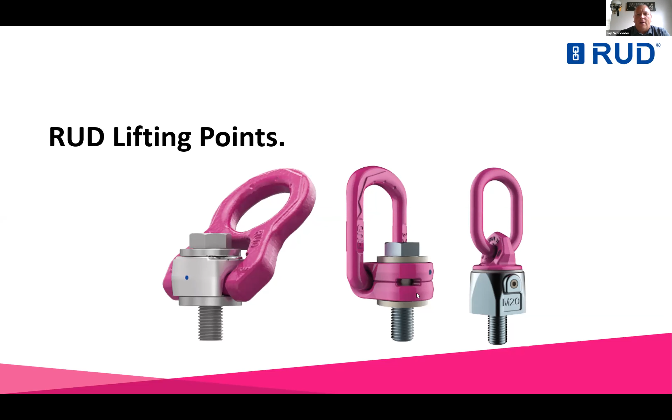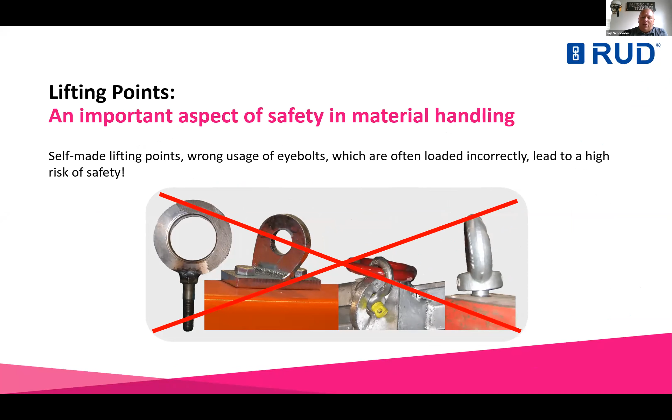So let's begin. Many times as we go into an end user, we kind of walk into the unknown. We see many homemade lifting devices or even modified devices. These are huge safety concerns, and it is one of the leading factors when we consider the design of new lifting points.

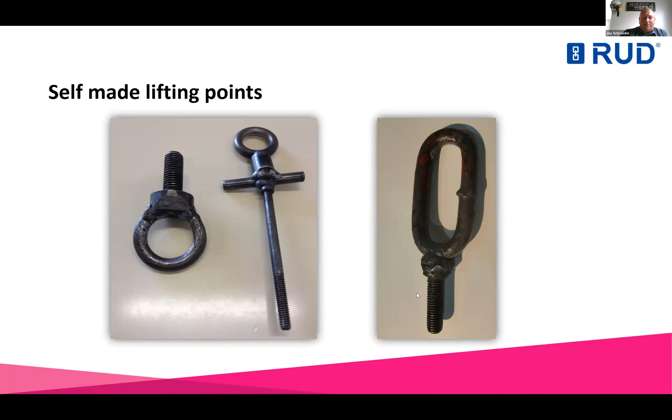RUD breaks down our lifting points in two categories, one for bolting and one for weld-on. So the first portion of the presentation is going to be on the bolt-on products, and then we'll work into the weld-on products at the end.

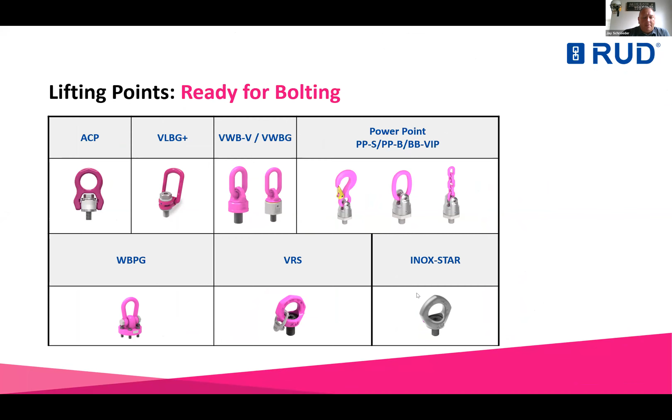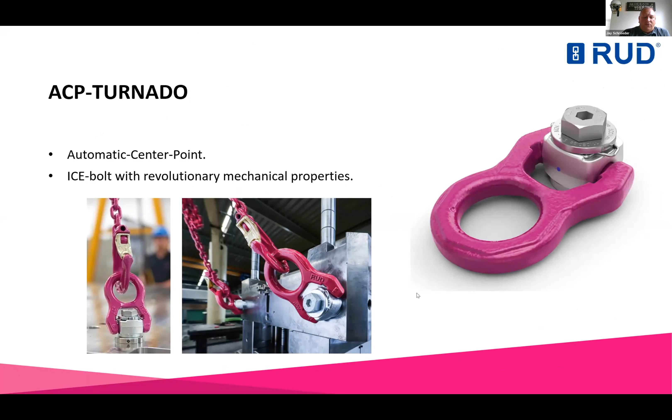The first product we'll talk about is our ACP, Turnado. This is our newest lifting point. We developed this to compete with the other center pull hoist rings. However, RUD feels that with a true center pull hoist ring, that when using in a side pull option, the hoist ring can get bound up, and when it gets unbound, it causes a shock load on the hoist ring and all rigging. So RUD has implemented a spring mechanism to keep the hoist ring from getting into that over center position.

As you can see in the bottom left-hand corner on the picture, you see a little spring on there. That will keep the bail from ever getting truly over the center of that bolt. So that's what we talk about when we talk about our unique RUD spring mechanism.

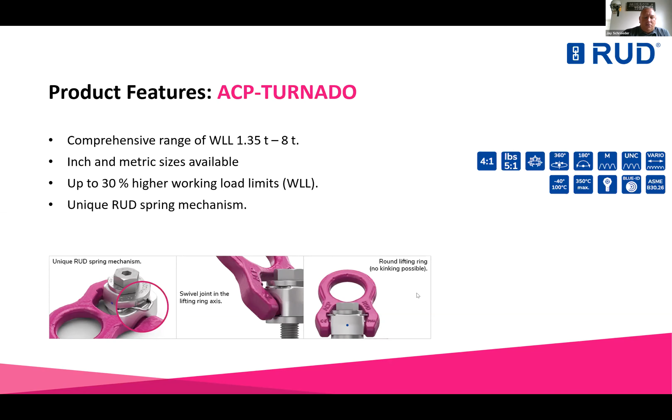The Turnado has a comprehensive range of 1.35 tons up to 8 metric tons, inch and metric sizes available, up to 30% higher working load limits due to the use of our patented ICE-bolt. So the ICE-bolt is available in metric sizes up to M30. It's something that we have designed and developed with some engineering staffs in Germany, and it has allowed us to take advantage of higher working load limits due to wear and the ductility of the bolts.

So again, this is our ACP Turnado. It does meet all ASME B30.26 standards. So that is a very important step for RUD, as before we only manufactured to the EN and DIN standards in Europe, and now we're starting to manufacture to the American, to the ASME standards.

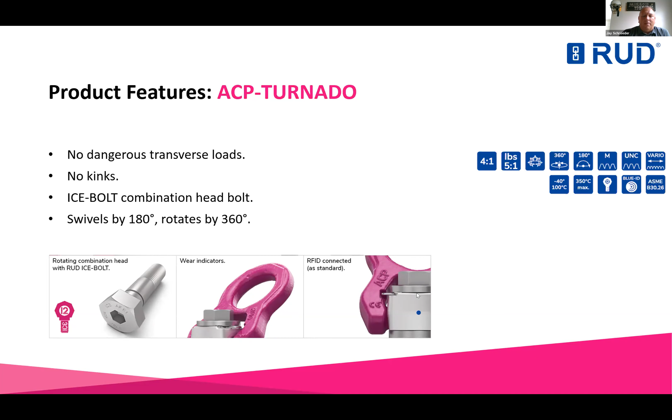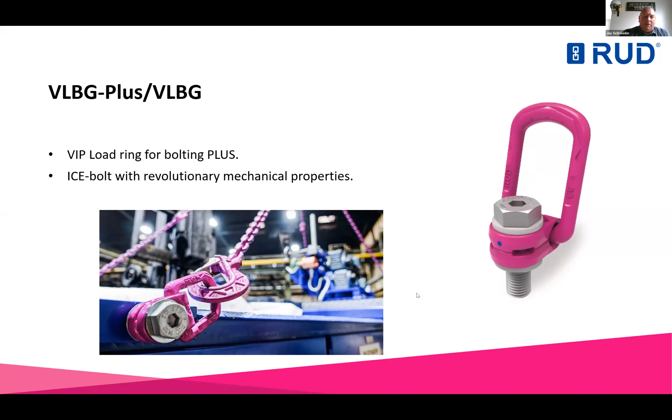The next product we'll talk about is the VLBG Plus and the VLBG. Again, you'll see this, here's a true side, offset side, this off to the side load ring. We have metric and inch sizes available, M8 through M48 and 3/8 through 2 inches. A working load range of 0.63 tons up to 20 tons.

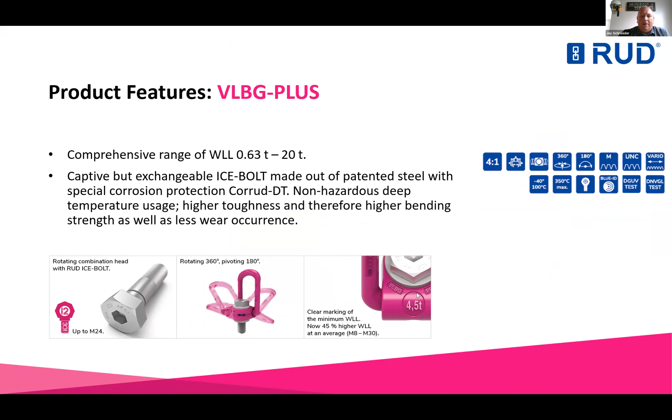The bolt is captive, but we can change it out. If you see the picture of the bolt on the left, you'll see a groove cut in there. We actually put a ring, a little keeper ring in there, and when you slide it down in the body, it snaps in and it's held captive. So if you damage your bolt during the lift process or as you're storing it, then we can go ahead and change that bolt out.

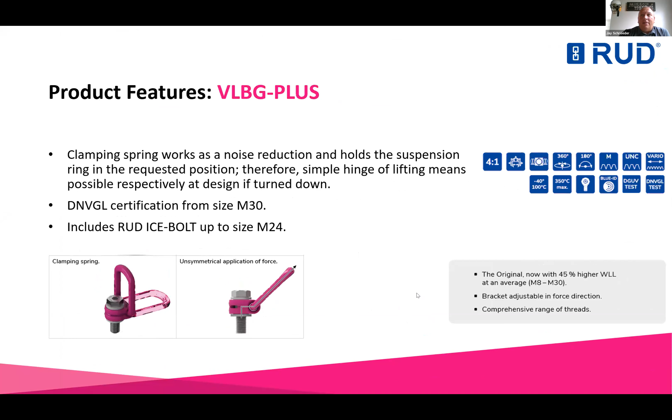We do offer longer bolts that we can use for through-hole applications. We'll put a washer and a nut, or even a lock washer or a lock nut, on the backside, taking advantage of holes that are already there. Maybe not a tapped hole, but we can take advantage of a through hole.

The next products we'll talk about are our VWBG-V and the VWBG. As you'll see, these are basically a true center pole hoist ring.

The difference between the two: with the VWBG, we machine the bolt as one unit, and with the VWBG-V, that's actually a purchased bolt that we put in there.

You can see on the side the blue RFID chips in there, so we can take advantage of that for the inspection process. And with the RFID, we can use anybody's readers to read these chips.

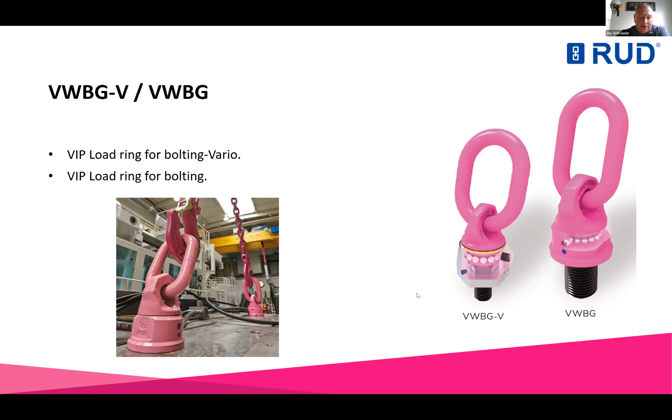This product line here has the highest working load limit for all of our bolt-on products. So with specials, we can get well into the 50, 75, 100-ton models.

Standard on the shelf, we can get up to 50 tons. So basically from 0.3 tons all the way up to 50 tons, standard off-the-shelf products.

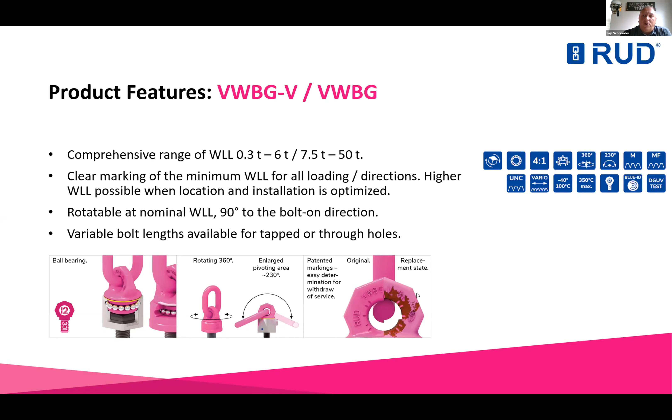Again, ball bearing construction. The picture at the bottom right shows the wear marks on the area that doesn't have the rust area on there. But again, it will show right away if it needs to be replaced.

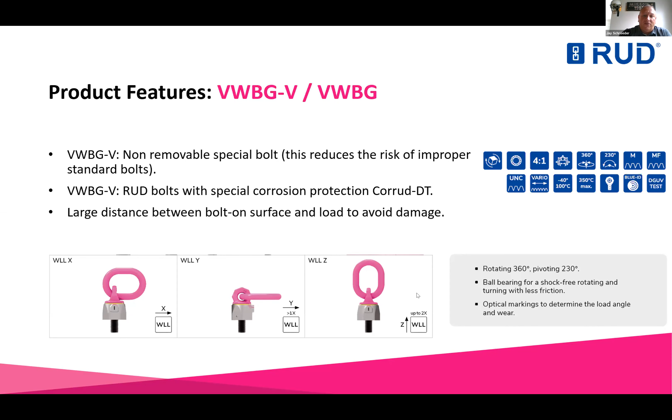So we encourage everyone to use their safety and user instructions to figure out what working load limit they need to be using at the time.

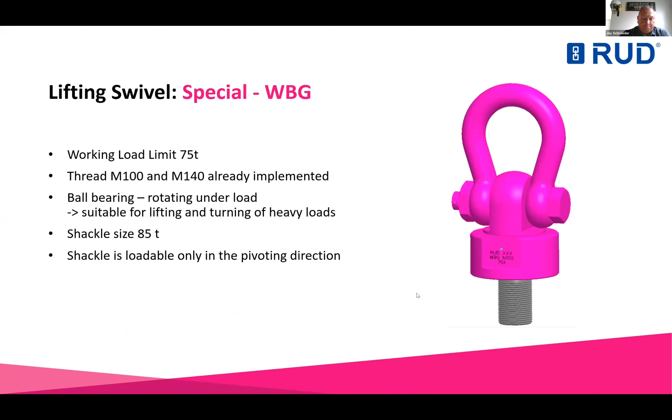The next group of products we'll talk about quickly here is our PowerPoint products. The advantage of the PowerPoint products is they're very, very versatile.

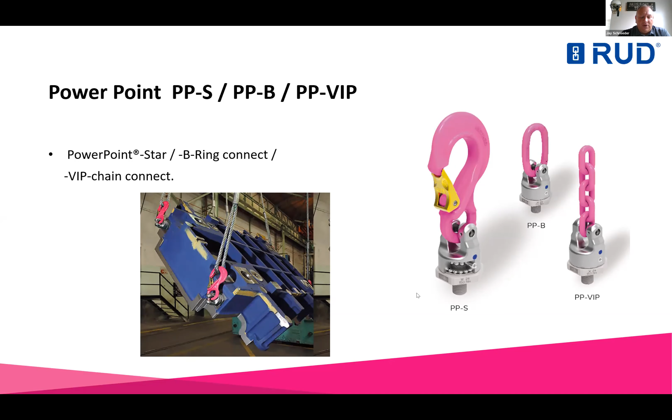In sizes bigger than the 4mm hook, so bigger than 0.63 tons, our hooks actually have a forged latch on them, not the stamped latch that you see on a lot of other hooks. So it's a very robust hook that we put on there.

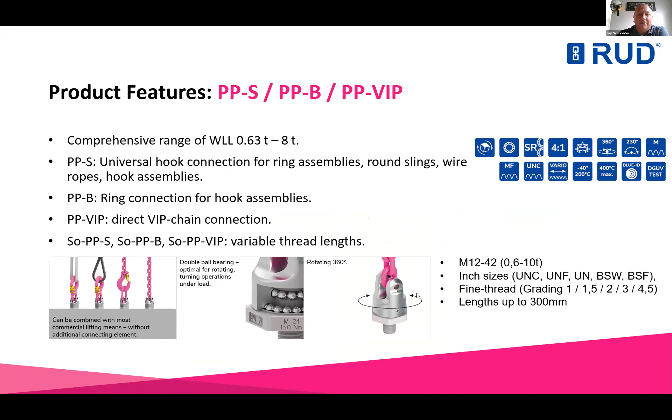Again, we can do all different sizes, inch and metric. We can also do fine thread. We can do British threads. So please let us know if you have something that's a little bit odd. We might be able to take advantage of it for you here.

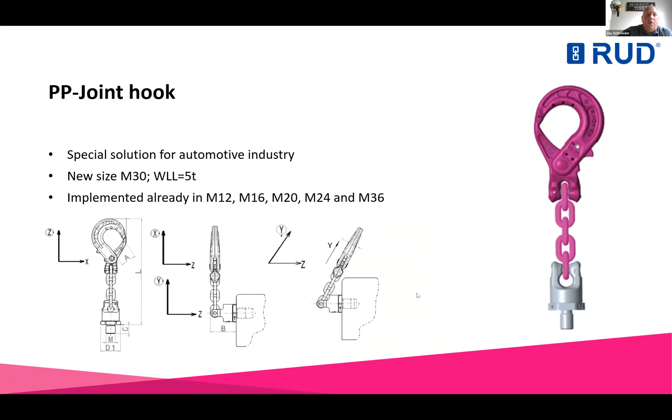We also have done some very specialized products here. When I say specialized, we had an application in the automotive industry where they needed a self-locking hook with a couple pieces of chain, just the way the lift was done. So we can do specials. Please let us know, for whatever the reason may be, we might be able to give you a hand here.

The product that made RUD famous is the VRS Starpoint. I think when people think of RUD, they think of the Starpoint. We are the original swivel eye bolt manufacturer. There's a lot of them now in the market, but we are the original.

Basically, this is how RUD got started in the United States. RUD discovered a need when walking in the shops that had bent or broken eye bolts. RUD developed an eye bolt with a separate bolt that could swivel without backing out when put under load. Many times using an eye bolt, when you go to make a lift, the orientation is not correct on all the eye bolts, and some will actually back out, cause damage, or ultimately eye bolt failure.

If you're making a one-time lift, hand tight is fine. If we're going to be making multiple lifts with that same lifting point and the piece that you're trying to lift, then we do recommend you go into our safety instructions and pull up the torque value for that.

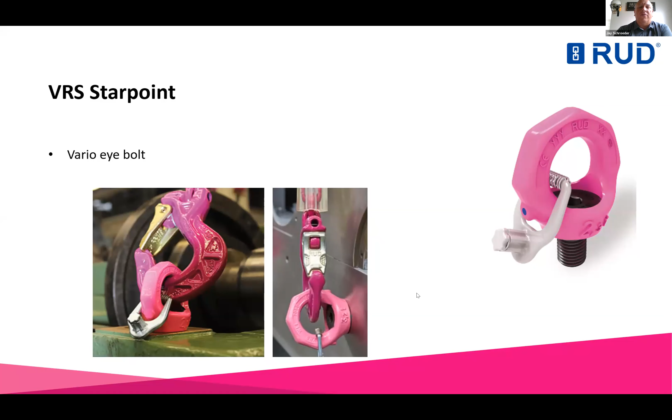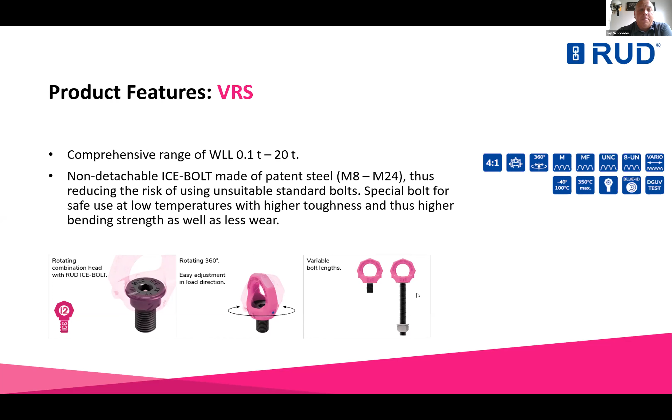We have a very wide range. We now go up to M64, and we still go to 2-inch on the inch size. So we have a very wide range for this product. We can get it with longer bolts. So there's many options that we can do.

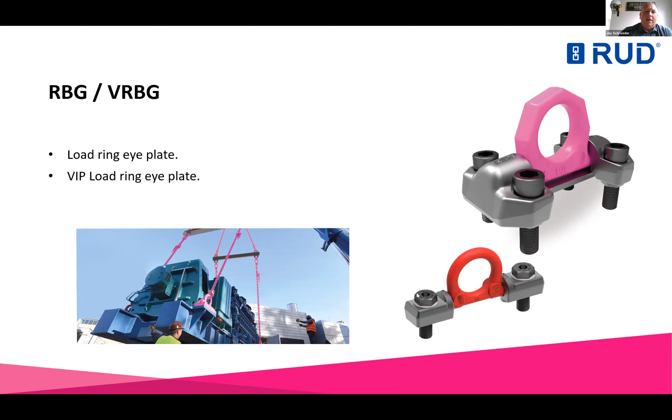The last couple bolt-on products we'll talk about, I'll go through rather quickly here, just for the sake of time. But we do manufacture many different kinds of bolt-on lifting points. So if you have holes, or you're designing a piece of equipment or machinery, please let us know, and we can help you out with any kind of lifting point that you may need. We really do specialize in some high loads and things like that.

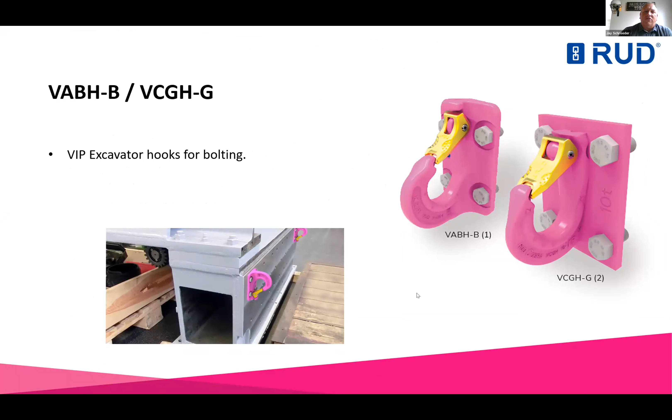Again, bolt-on excavator hooks. You can see on the product on the right-hand picture there the wear marks, and these can be lifted or actually lashed down from as well.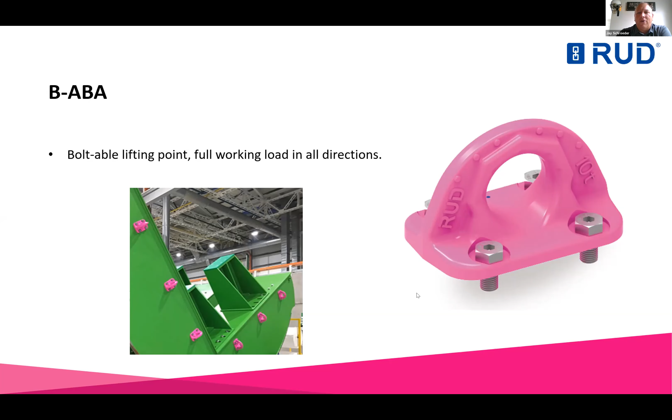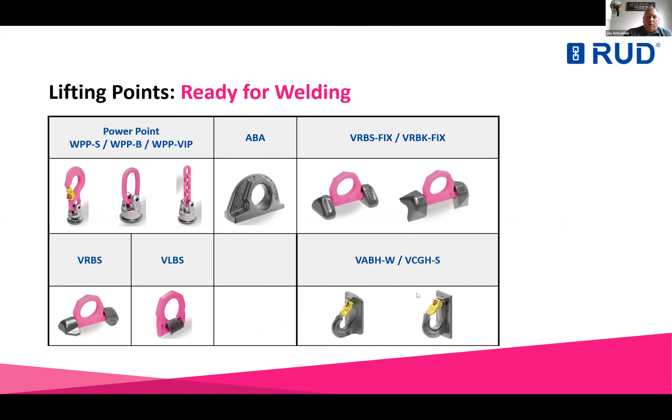That's what we do. The second part now, we'll discuss a few of our weld-on products. Please keep in mind these can also be used for lashing. For lashing, we'll double the working load limit, which at that point in time becomes a lashing limit.

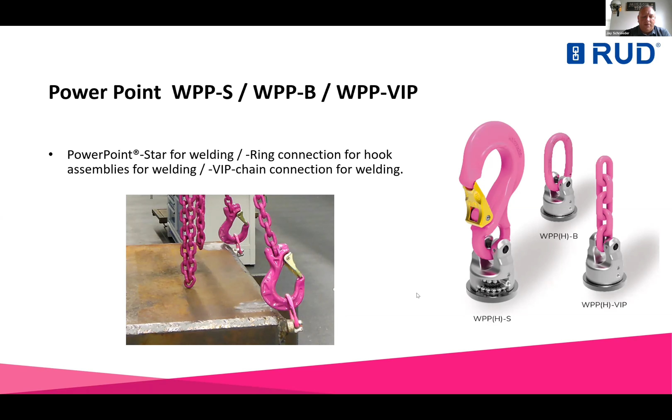The first one we'll talk about looks very familiar to the one we talked about in the bolt-on selection. This is our WPP series, our PowerPoint series for welding. We can offer it with a ball bearing, so it can swivel, or a standard fixed position. This is very handy in the construction industry, where maybe before they had a flame cut hole and were using a shackle. Now we can weld this to the side of it and take advantage of a hook versus having to use a shackle, and maybe save them time and some safety.

Our most basic lifting point for weld-on is our ABA. Very wide range of products, but it's just a very good stationary lifting point. You can see definitely the wear marks on the ring. The little dimples on the top can be used for angles. So if you're trying to figure out your angle, we can use those as a guide.

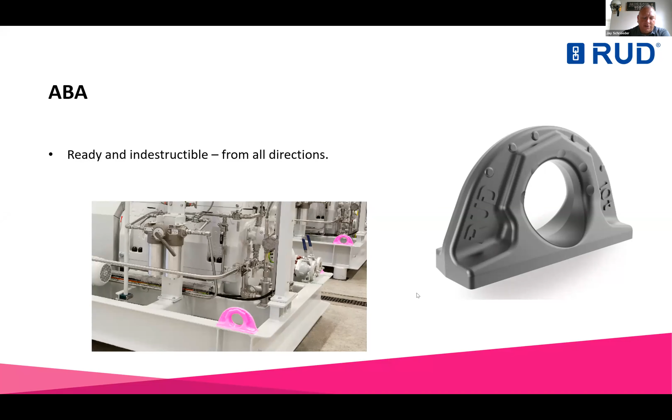So we do have several safety features involved here. With any of our weld-on products, please remember all welding instructions can be found online, or in our user instructions. So please don't hesitate to ask. If you see something you don't quite understand, please let us know. But we do ask that you have a competent welder weld all these products on before you make your lift.

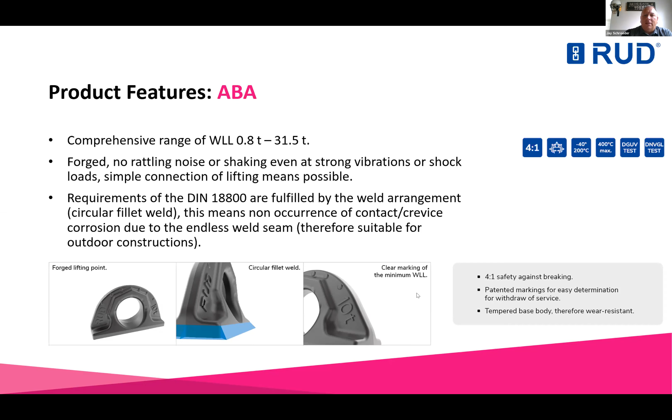So we do have a very comprehensive range, 0.8 tons up to 31.5 tons on the ABA. Again, very, very basic lifting point, but it's a very good seller for us as well.

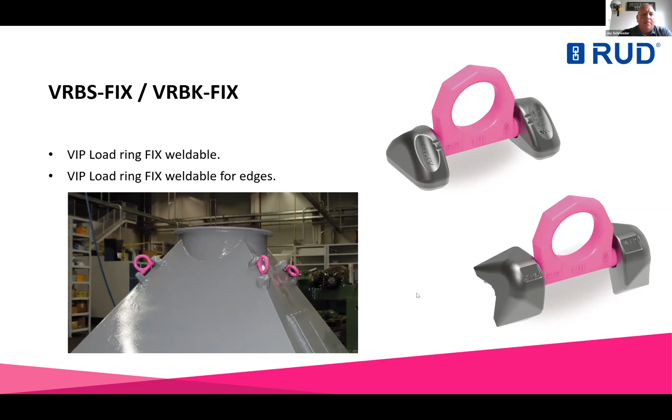The next products are the VRBS Fix and the VRBK Fix. The VRBS is the top one, meant for flat, clean surfaces. We have a nice radius edge along the bottom, so you can get a good fillet weld around there. The VRBK is meant more for putting on corners, so you can put it on a corner like you see in the picture there and take advantage of that because you weren't able to use maybe the side panels to weld to. So it gives you another option.

Again, very comprehensive range, 4 tons up to 50 tons. We can even do up to 100 tons, depending on the application. You ask, why do we call it the Fix? The weld blocks on the sides, if you look at the bottom picture to the left, those are considered weld blocks. The second picture shows a brass ring or spring that retains the weld block in position, so when you're welding, you don't have to worry about setting up any dimension to make sure you have the right spacing. It's automatically done for you. We do that with the VRBK as well, so that way we can take advantage of quick welding and not have to fumble around with the blocks.

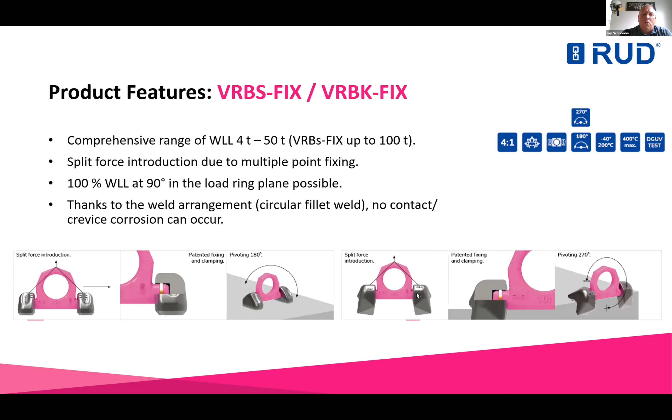The VRBS is very similar, except that we don't have the fixed blocks. Now we have to worry a little bit more about setting up the spacing, and it sits a little lower to the product. So it's another option we have, a very good product, and again, we can get up to 50 tons of these as well.

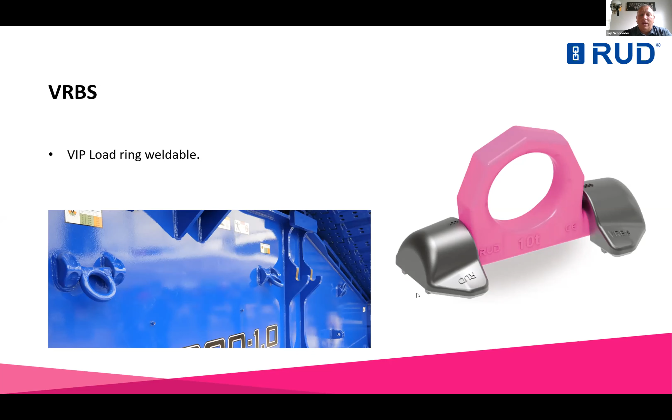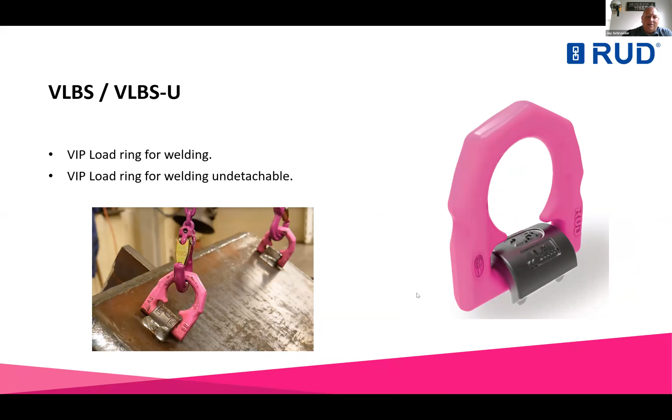The VLBS and the VLBSU, these here are great. These are very, very compact. We go 16 tons on these. They have a spring that we'll show you in this next one here. If you look in the second picture, you'll see a clamping spring, so that weld block is automatically attached to this D-ring. There's no need to try to set it up in the middle. It's already centered. You're ready to go.

Basically, you can use both hands to weld. You don't have to hold the ring because that spring will retain the position of that D-ring, so we can put it in an upright position and start welding down along both sides. Again, very big range, 1.5 ton to 16 tons. You get a full pivot of 180 degrees and 100% working load at 90 degrees in the load ring plane. So a lot of capabilities here with this lifting point.

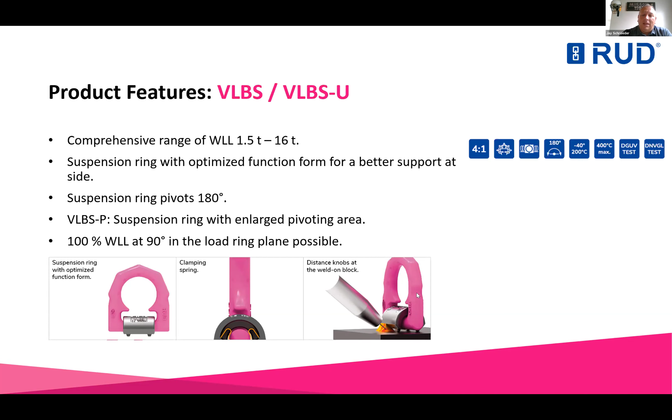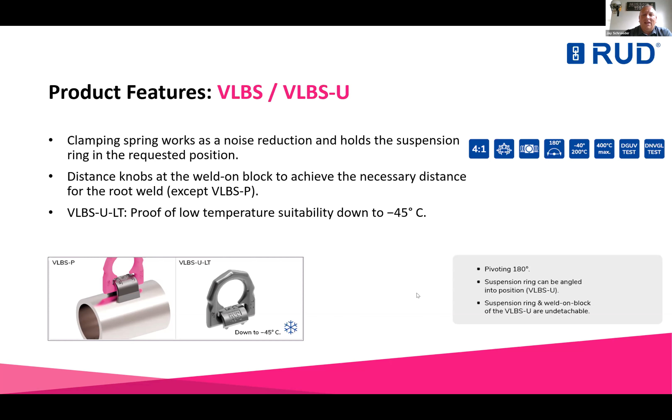Along with the VLBS, we have a VLBS-P, which is for pipes. So if you have a curved radius surface, we can use the VLBS for that as well. And we also offer the U-LT model, which is for ultra low temperatures. So if you have a need down to minus 45 degrees Celsius, we can take advantage of this and use this lifting point.

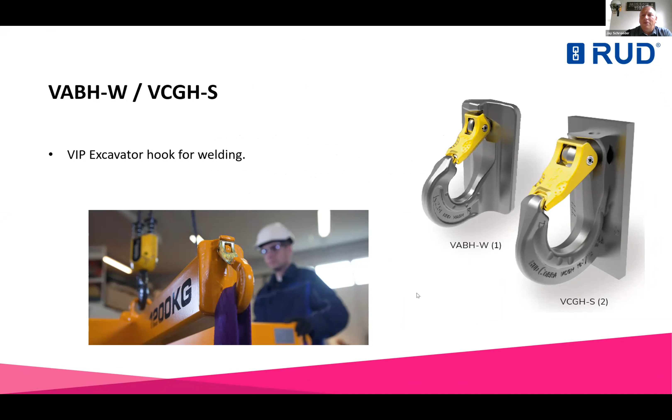Again, similar to the bolt-on, we have the weld-on excavator hooks. Many different uses for this. We can use it on machinery, we can use it on lifting beams, a lot of uses for this. So again, we have some products available. Please let us know how we can help you out.

I know this was a very quick overview of the RUD products, and we did not get a chance to touch on some of the other products that we offer, but I wanted to just give you a highlight of what RUD offers and what the Caldwell Group can do to help you out. And if there's anything we can help you out with, please let us know.

Any questions, Justin? Yeah, we actually had 2 questions come in. The first one, can the forged latches on the sling hooks be backloaded? No, we would never recommend to backload the hook there. Short and sweet.

What are the load test requirements for weld-on lift points and hooks? So all of our stuff is done to 125% load testing at our facility. We do batch testing on them.